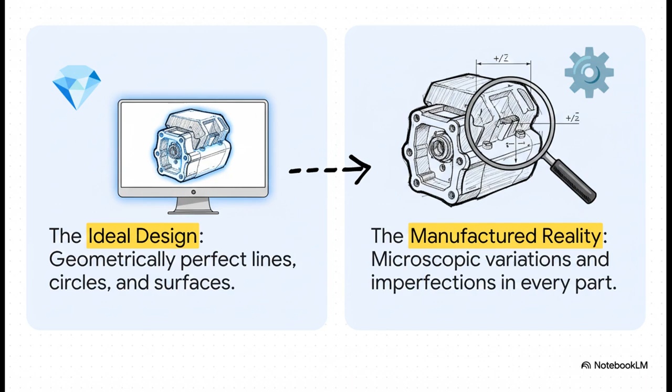So the real question is, how do you build a world that actually works when it's made out of all these imperfect pieces? Well, the answer is you do it with a language, a very specific, universal language that isn't designed to get rid of imperfections, but to control them. It's called geometric dimensioning and tolerancing, but you'll almost always hear it called GD&T for short.

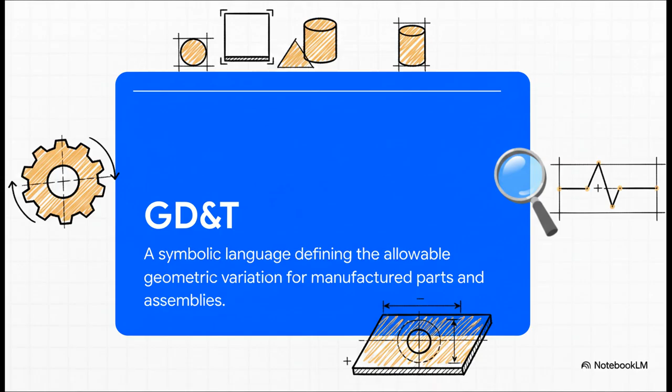And this is where things get really interesting, because the core idea here is a total shift in thinking. GD&T is not about telling a machine, make this hole perfect. No way. It's about saying, okay, here's exactly how imperfect this hole is allowed to be. You're defining an acceptable zone of variation. It's not a quest for perfection, which is impossible anyway. It's all about the intelligent management of imperfection.

The research we're looking at today literally calls it a symbolic language that's used to describe imperfections, and that's exactly what it is. It's the only way a designer sitting in, say, Germany can talk to a manufacturer in Japan and have them both understand exactly the same thing, with absolutely zero room for misinterpretation.

So why does this matter so much? I mean, really, what's the big deal? Well, it's because GD&T is basically the secret engine that makes the entire global supply chain work, period. It's what lets a company design something here, build it over there, and assemble it somewhere else entirely, and still be confident that it's all going to fit.

This language controls not just simple size, but complex things like the flatness of a surface or the precise location of a hole. Get that wrong, and oh boy, you are looking at a world of hurt, costly rework, wasted materials, and project delays that can cost a fortune.

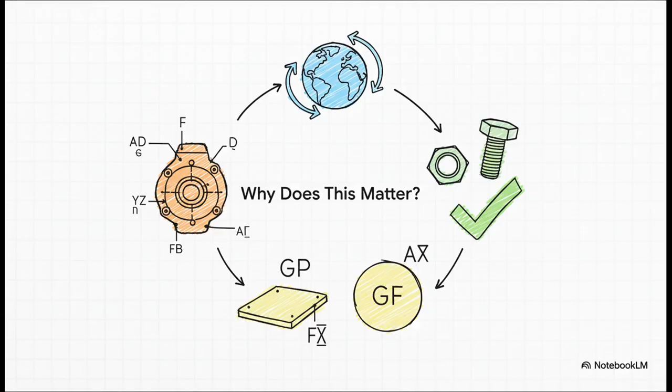Okay, so laying down the rules with these symbols is one thing. That's half the battle. But you also have to check the work, right? You have to measure the results. And that brings us to the next part of the story, the journey from a perfect digital idea to a real-world certified part.

And it works like a loop, this constant cycle. It starts when a designer specifies all the rules using GD&T. Then, of course, the part gets fabricated. But here's the critical part: inspection. You have to measure the real thing. And if it passes, it gets certified, confirming it does what it's supposed to do. This whole loop is built on our ability to measure things with just mind-boggling accuracy.

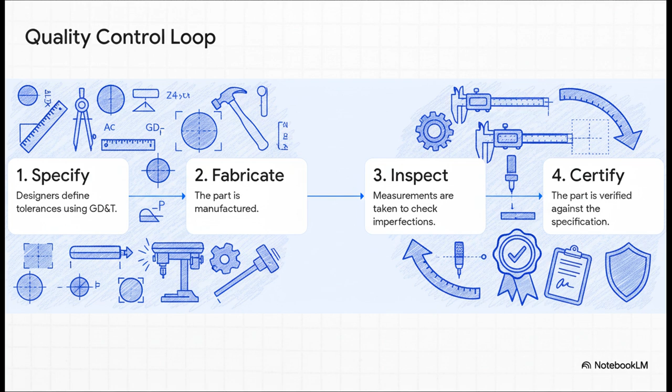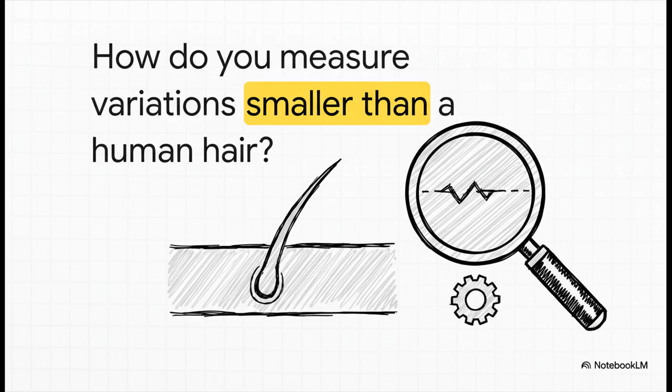Which brings up a pretty big question. We're talking about tiny, tiny variations here. So how in the world do you measure an error that's literally smaller than the width of a single human hair? You can't just pull out a ruler for that.

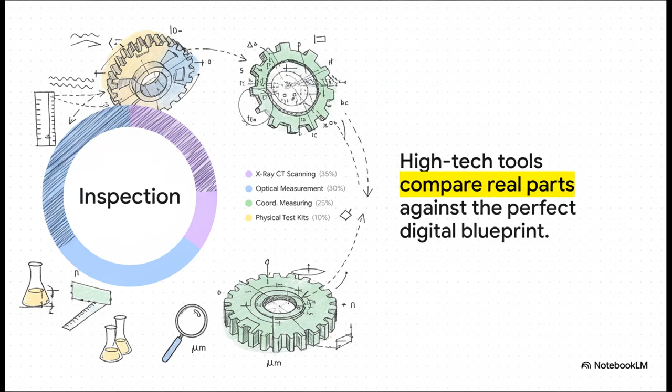The answer is you use some seriously cool, high-tech gear. You've got things like X-ray CT scanners and advanced optical measurement systems, which make up most of what's used today. These tools are amazing. They basically create a perfect digital copy, a digital twin, of the real object.

So you can compare the physical part to that perfect blueprint, down to a single micron. And it's only getting smarter. The next step is something researchers are calling ontology-based intelligent certification schemes. It's a mouthful, I know, but here's the simple way to think about it: we're basically teaching an AI to be a master quality inspector. The idea is to automate the whole process, making it way faster, more reliable, and not so dependent on having someone with 30 years of experience.

So this language of precision, it's not some old, dusty rulebook. It's alive. It's evolving all the time. Which begs the question: how is it adapting to the most cutting-edge, futuristic manufacturing tech that we have today?

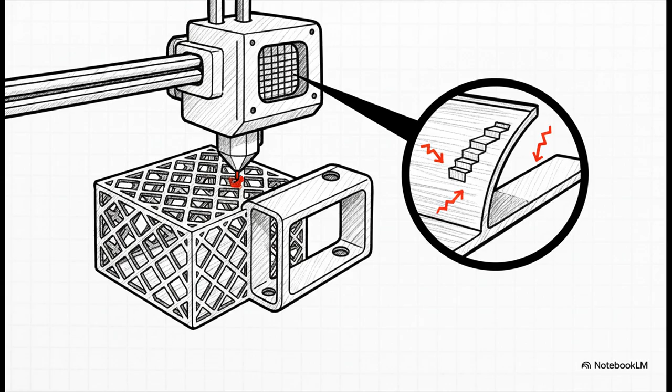Well, one of the biggest new challenges is additive manufacturing. You know it as 3D printing. Because when you build something layer by tiny layer, you get completely new and unique types of geometric errors that you just don't see in traditional manufacturing. And so, of course, engineers are rising to the challenge. They're writing brand new standards like ISO/ASTM 52902 just for 3D printed parts.

They're pointing those advanced optical scanners at these new complex shapes, and they're even going back to something that sounds pretty simple: physical fitting kits. Basically, a go, no-go gauge to quickly test if a printed part is going to work in the real world.

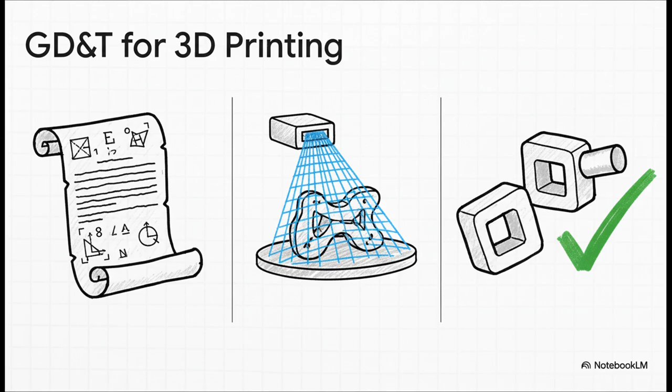But it's not all about the small stuff. The challenges are just as big, maybe even bigger when you go in the total opposite direction, to projects that are just massive, almost unimaginably huge. I want you to picture a tokamak fusion reactor. We're talking about thousands of enormous, ridiculously complex parts, and they all have to come together and align with near-perfect precision. You can't just ship them to the site and cross your fingers. The cost of just one piece being slightly off would be absolutely astronomical.

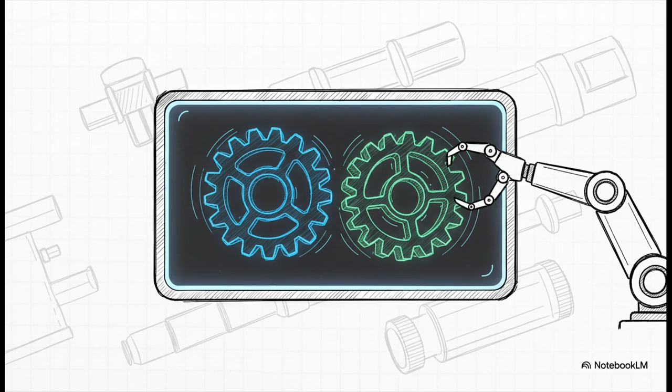So how do you solve a problem that big? The answer is something called virtual fitting. And honestly, this is where the tech gets really cool. Instead of the old school way of hauling these giant pieces into place and hoping for the best, engineers do something incredible. They take a super high precision scan of every single real component after it's been made, capturing all of its unique tiny flaws.

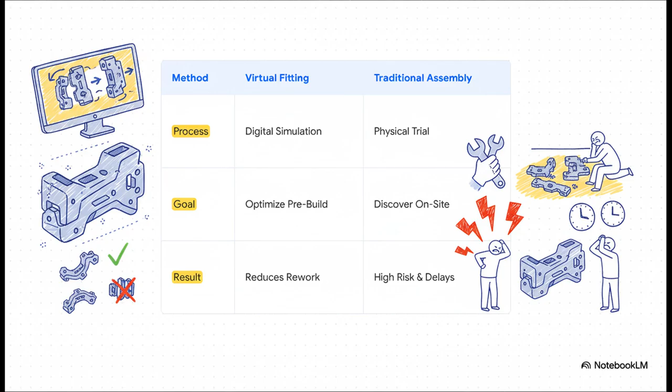Then they build the entire reactor in a computer. They run thousands of digital assembly simulations to find the one single, optimal way to fit every piece together. They solve the puzzle before anyone ever picks up a wrench.

So, all of this brings us to the big takeaway here: the future of fit. Because this language of precision, this whole concept of controlling imperfection, it is the invisible scaffolding that our entire modern world is built on. Think about it. GD&T is what makes everything possible, from the phone in your hand to those insane fusion reactors.

And it's getting even more connected. New standards are creating a seamless digital link all the way from the initial design to the final inspection report, with no information getting lost. At the end of the day, understanding and mastering imperfection isn't just an engineering problem, it's the key to unlocking what we can build next.

And that leaves us with one last question to chew on. For the last century, we've been perfecting this language for humans to talk to machines. But as our machines get smarter, as AI gets more powerful, the next great frontier is pretty clear, isn't it? How do we teach them to speak the language of precision, all on their own?